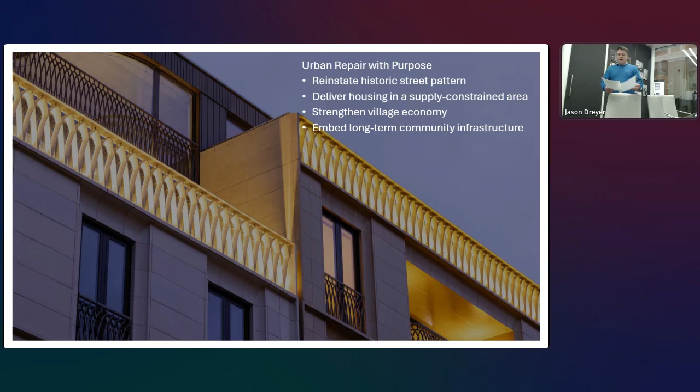Chapter 2. It's about the people. Marylebone Square excels not through gestures, but foundations. 79 new homes, including 25 on-site affordable units, which is around 30% provision, offering homes for key workers and local residents.

Instead of pushing affordability outwards, the project keeps people within the community, preserving the mixed social character that makes Marylebone feel like a village.

The new community hall, aptly named Marylebone Hall, anchors the ground floor. It is open, it is flexible, and it is civic-spirited, used for events, gathering, and neighborhood programming.

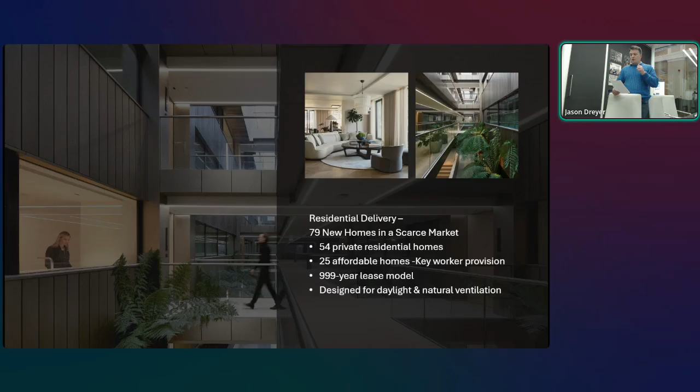Around the building, independent retailers are carefully curated, chosen not to compete with the Marylebone High Street, but to complement it. Importantly, during construction, the beloved farmers market remained in operation. Continuity of local life was designed into the process, not retrofitted. This isn't a building that lands on a neighborhood, it lands with it.

Chapter 3. A quietly radical approach to urban living. Improving how people live, gather, and connect, Marylebone Square's innovation is subtle but transformative.

Reinstating historic streets is placemaking innovation. It reinforces livability, movement, and walkability.

Retail innovation that centers people, not profit. Before occupation, units supported meanwhile use independents, giving local creative entrepreneurs a foothold in the local economy. Several, including Neko Health and Special Guests, have chosen to stay as long-term tenants.

Innovation with human purpose. A naturally ventilated 5-story central courtyard turns a dense urban block into a fairy tale small internal neighborhood floating in an urban forest. Daylight, air, greenery, live landscaping, and a social proximity support well-being with resilience, without reliance on mechanical systems.

Functional, flexible, and future-focused. The building structure includes no fixed retail partitions, allowing units to merge and subdivide. The program is designed to shift. Retail, workspace, community uses can evolve as Marylebone evolves. It is innovation expressed not through spectacle, but through intelligence.

Chapter 4. A place made to endure. Here, every layer has purpose. Homes that breathe. Dual aspect apartments frame light and air around a central courtyard, supporting natural ventilation and everyday comforts, as well as opportunity for neighborly engagement.

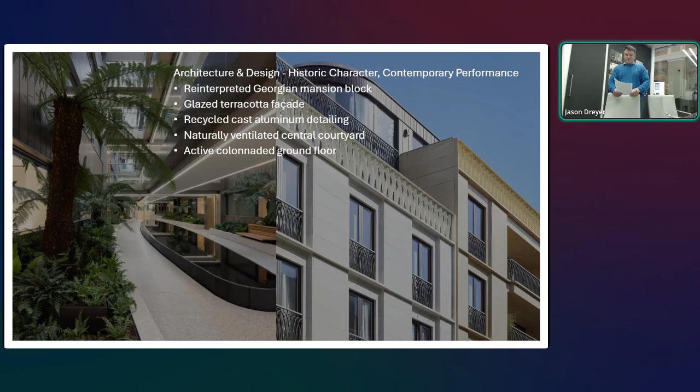Sustainability. Marylebone Square's sustainability story is holistic, targeting BREEAM Excellent, which is the top 10% of UK buildings, Code for Sustainable Homes at level 4, 150 PV solar panels integrated into a green roof, grey water recycling and runoff reducing roofscape, recycled UK sourced aluminium and ceramic facades, and off-site modular construction, minimizing waste.

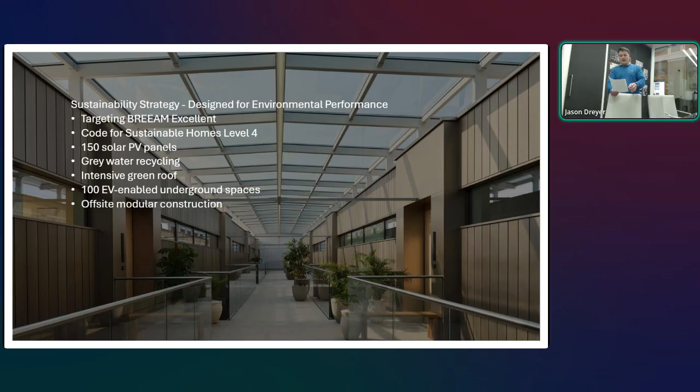And crucially, no demolition, meaning no embodied emissions from clearing existing structures. It's a sustainability strategy grounded in material intelligence, energy performance, and whole life carbon awareness.

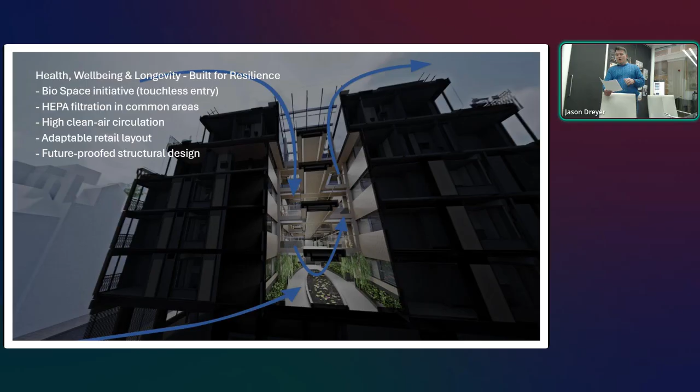Chapter 6, Stewardship. Marylebone Square's governance story is one of partnerships, extensive consultations through exhibition, workshop, and resident engagement, ongoing collaboration with the Westminster Council, farmers market preserved throughout construction, and a financial model for long-term management and community benefit.

Marylebone Hall formally operated as a civic asset, not a private amenity. This is stewardship, the kind that builds trust, not just buildings.

So, what is Marylebone Square? It is the repair of a 50-year gap in a beautiful Georgian smile. It is the strengthening of community through affordable homes and independent retail. It is a healthier, greener, more walkable piece of the city.

It is a building shaped by governance, crafted with care, and designed for adaptability. It is a place that feels unmistakably Marylebone, rooted in history, but confidently facing forward. In short, quiet, precise, deeply human, and entirely of its place. Thank you.

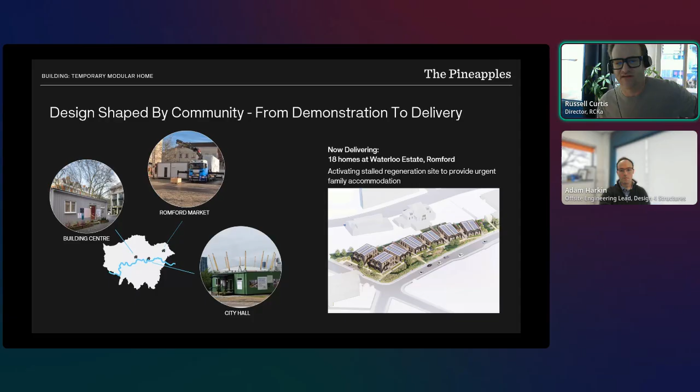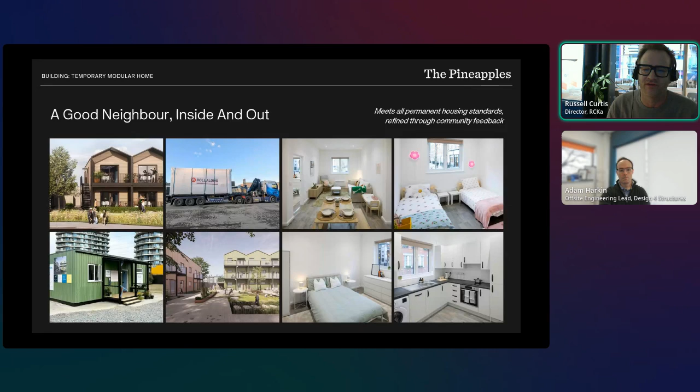So it's not just about the homes themselves and the interior of them, but also how these are sited. They are intended to be good neighbours to people and settle quickly into a local area, even if that is a meanwhile use on a site that might be stalled or whatever.

Adam, you want to talk a little bit about this?

What we've created isn't just a modular home, it's a system. Standardized modules create 1 to 4 bedroom homes with the ability to go beyond if required. Everything is digitally coordinated for clash-free, build-ready certainty, with 90% happening in an off-site factory controlled condition. This reduces waste and improves quality.

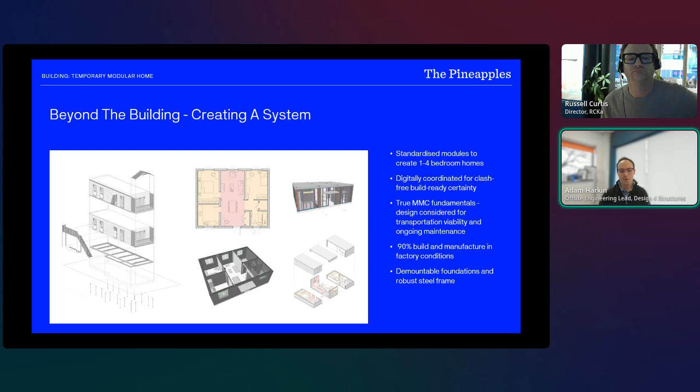It's designed for a 60-year lifespan, which takes into account multiple redeployments over that time. Demountable foundations and a robust steel frame mean the modules can be lifted and relocated elsewhere with minimum ground disturbance. This transforms temporary housing from a disposable expense to a long-term public asset.

Instead of spending money on nightly hotel rates, councils invest once and own an asset that they can relocate and reuse for 60 years. After 3 to 5 years, the homes have paid for themselves through savings, but they can keep delivering value for decades to come. It's resilient by design, adapting to changing community needs over time.

These visuals are a time lapse from the installation at the Building Centre in London. As can be seen from these, the modules can easily be installed on even the tightest of sites.

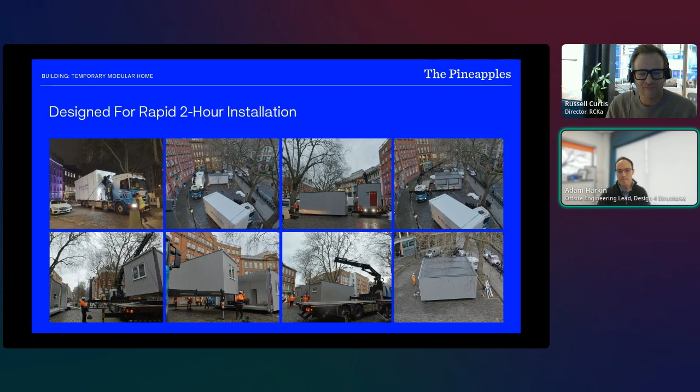Environmental performance is integral to this system, and it starts at the design stage. Design 4 Structures provided complete design coordination using DFMA principles, meaning every element is coordinated digitally before manufacture. Through this coordination, we achieved clash-free build-ready certainty early in the design process, which reduced rework and material waste.

This digital certainty then enables factory precision, which reduces waste by around 90% and cuts build time by roughly 30%. Factory controlled production delivers approximately 40% lower embodied carbon than traditional construction.

Because the system is circular, fully demountable and recyclable, with complete digital traceability of every component, the environmental benefits compound with every relocation over its life. DFMA coordination at the front end enables this circular performance at the back end. This is truly sustainable construction where the environmental values multiply over time rather than being lost after one use.

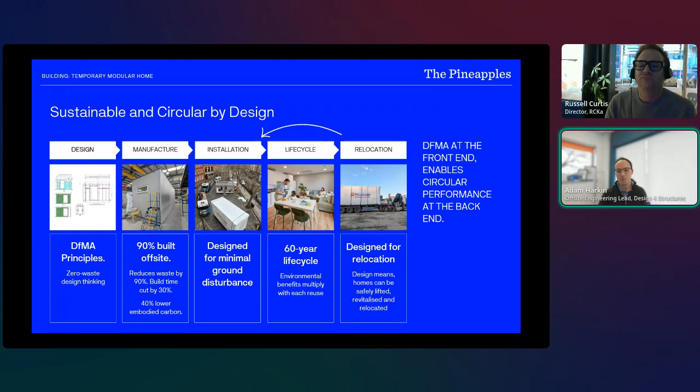As I said earlier, although these are temporary homes, we need to stop calling them that. It's a meanwhile deployment, but they are permanent homes. They're homes that can be moved many times, and we see them forming part of a long-term vision.

Partly because they can be moved from place to place and repurposed as developments come forward, but also in the long term these modules can be reused and reallocated and turned into permanent homes for permanent locations. So in 60 years' time, they could still be providing decent homes for families in need.

We reckon that there's around £63,500 saving per adult per year, and so these will pay for themselves within a 3 to 5 year period when purchased by the local authority.

It's important to hammer home the fact that these are fully compliant, fully space standard compliant homes. They're actually more generous internally than a lot of new build housing, and they're also certified, warranted to BOPAS, and it's an asset that the local authority can purchase.

There's a summary of where we are, but I thought I'd drop this photograph. It was taken yesterday, as it happens. Nice blue sky. That's the first of the modules I mentioned earlier in Havering in Romford being lowered into place. That's the first of, I don't know how many there are in total - maybe around 80 modules.

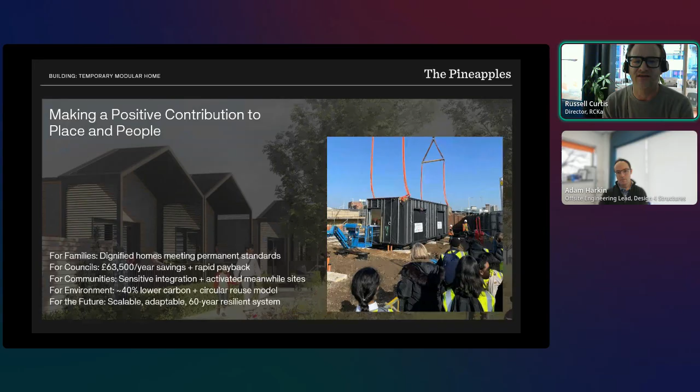Each one just lands onto, sits lightly on the ground, sits on small foundations, and can be zipped up and connected in a couple of hours. I think that's it. Thank you.

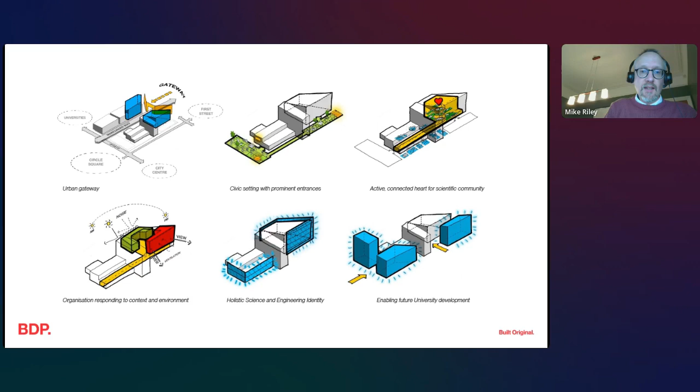Hopefully the slide will move. It wouldn't be a presentation without a slight technical hitch, would it? Oh, now it's gone back 5 slides. Apologies for this.

Once we'd set the concept for how the site captured the elements of the vision, we had an approach to how we would design this building, which was very much setting back from the street to give it that civic presence.

It was expressing the functions of the building so that undergraduate teaching, visibility and showcasing all happen at the lower elements of the building. And it's responding to the urban site by articulating the workplace and research elements of the scheme towards the top of the building.

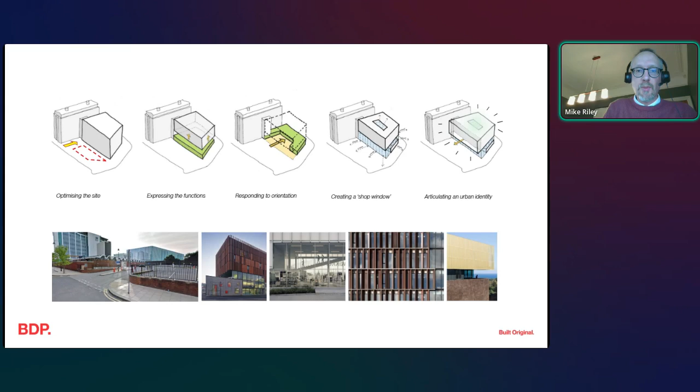A critical part of this project was making sure we were responding to the streetscape, being part of the city, and being mindful that although there is a teaching, research and workplace element to this building, it was seen in context of the neighbourhood, responding to the residential uses close by to the site.

Key elements of the approach were about having this gold facade which wraps the building at the upper levels. The science and engineering design provided views from that elevated roadway into the super lab, which was one of the core transformations in their teaching for the cohorts of undergraduate students.

It enabled them to teach a huge number of students all at once, rather than having to do multiple repeat teaching events in sequence. This freed up time to do academic research as well as teaching.

A key element for the project was very much about identity. There were 4 departments within this building, and we worked with them to identify imagery associated with the various science happening in the building. We looked for images that occurred within each science discipline, and brought these together to create an abstract pattern that was used on the external facade and also as a motif internally on staircases, glass screens, etc., to drive home to the student body and the city that this was a building with a huge amount of identity and quality, that was a home.

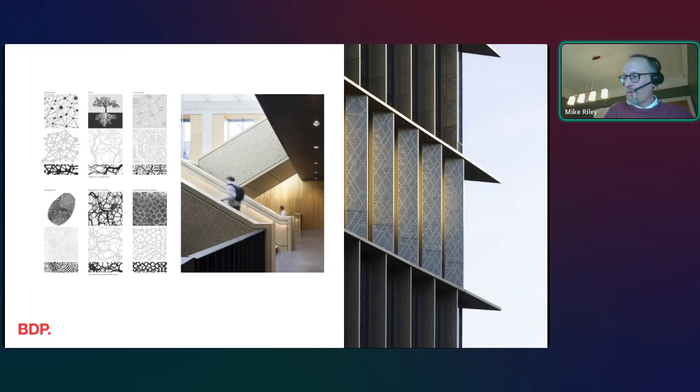I think a key part of that element of it being a sort of home for the university was by giving it this ability to be easily recognizable.

It also started to think about how it would work from a philosophical point of view for when students joined. Taking a section through the building, we worked hard with the users to think about where the best functions would occur. The lower parts of the building were very much about undergraduate study - this idea that you'd join as an 18-year-old coming into an environment like a scientific workplace, giving you a high quality of environment, enabling you to have social, professional, informal and formal interactions that would tell you what it was like to be a scientist.

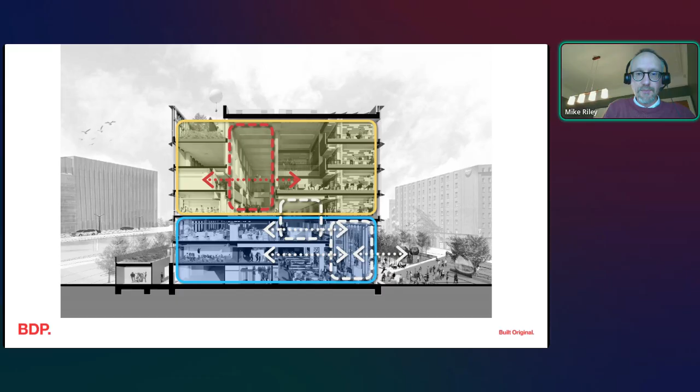As you move up through the building to the upper stories, that's almost once you've graduated - this is where you'd go to do your doctorate, where you'd do your work life, become an academic, do your research. You still had a similar sort of environment, so you could see you were moving through the ages of literally age, and also ages in your career itself. That was an important part of this scheme.

Internally, that translated to an incredibly flexible building. From a sustainability point, we took a very long life, loose fit approach to the structure - large spans, open spaces, hard durable materials that would look good for a long time, introducing natural timbers for warmth, etc. These spaces were designed so that in day-to-day operation they could be social, but in other settings you could invite trade shows, industry events, local community sessions, all coming into this space and changing its purpose. It was very adaptable and part of giving back to the wider community.

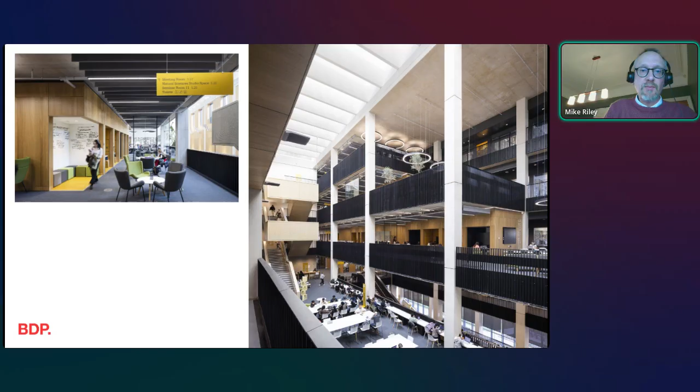That idea of making sure people were involved and helped us design these spaces followed through to the workplace above. There were a series of departmental homes for the students dotted around the building, and we worked hard with the student body to involve them in getting their department's identity into the design, while giving them flexibility to show the rest of the academics and students who come to this building because it's a great place to work. It showed them what they do day-to-day and gave them an ability to highlight their good quality work and best practice throughout their academic and research life.

At its core, though, this building is all about transformational science teaching. It's all about research, all about laboratory spaces - they're all highly technical spaces in this building. So at the heart of this, we had to be very clear about the functionality and making sure the functionality of this building shone through importantly in every aspect of the scheme.

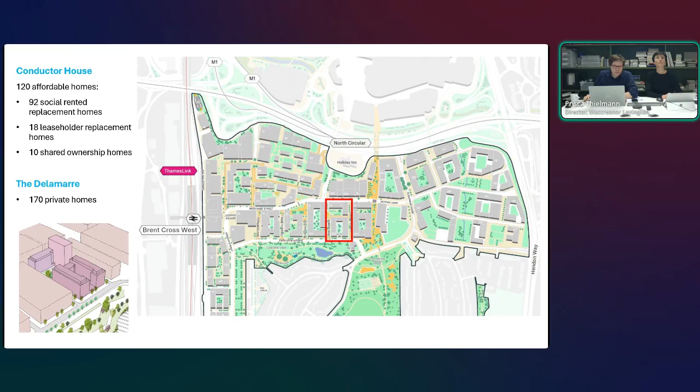And a bit like our work in King's Cross, the story begins well before the first residents walk through the door of the new building, which happened this time last year, roughly. So here's what was completed several years in advance of that moment: the first major new mainline station in London for over a decade, Brent Cross West, was open, 2 new parks, a parade of shops supporting local businesses that are now being relocated into the permanent master plan, and a visitor centre where anyone can walk in and ask a question 7 days a week about the development.

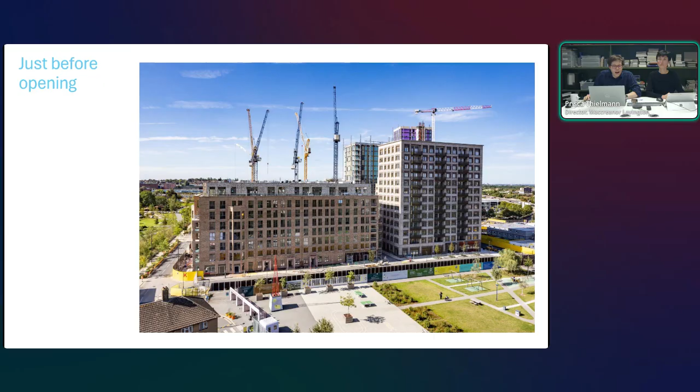So this was the scale of the delivery before Conductor House and the Delamarre were delivered into these green spaces and new connections into central London, which was all part of the strategy for bringing these buildings forward from the beginning. More importantly, perhaps, on the ground, these key social spaces were there for future residents and other local people to take ownership of.

By investing in all of this, there was also to date a £230,000 community fund project, now having awarded funds to 52 community projects throughout the local area. We were trying to embed these aspirations of the town before buildings were completed, giving the place tangible identity and benefit for locals who were going to be moving in there within the coming years.

And that really set the context for the engagement we did on Conductor House more specifically, where residents of the Whitefield estate similarly took ownership of that process in what had been a very, very long wait for this building to come, well before Related Argent was involved, to get to the point of walking down the road and into their new homes. This project has been an idea for the same amount of time as King's Cross has.

And on the macro level, that included making sure that the replacement homes were the first homes to be delivered across the 6,700 planned for Brent Cross Town. But on the micro level, it was about several things.

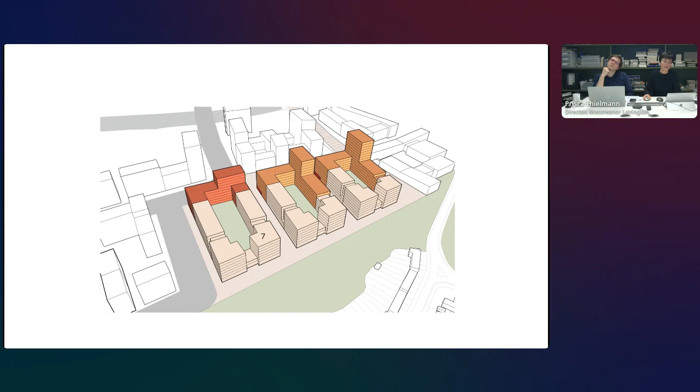This is obviously still a large-scale jump in the context of the very suburban setting of Brent Cross. In order to achieve a human grain of scale and to mediate with the surroundings, we added further to the building's volume articulation. Following on from that, we continue to interrogate the length of the buildings and the blocks and the streets, and worked on one of the plots.

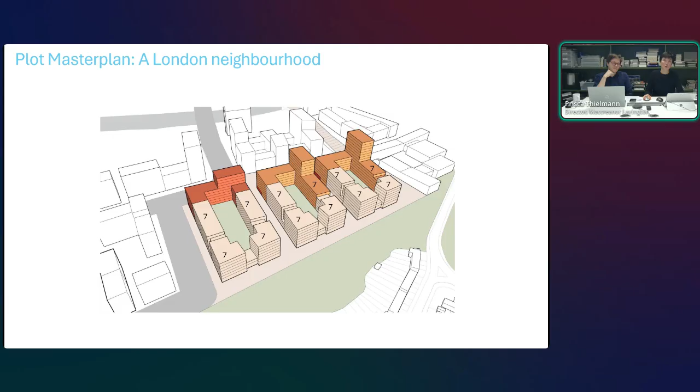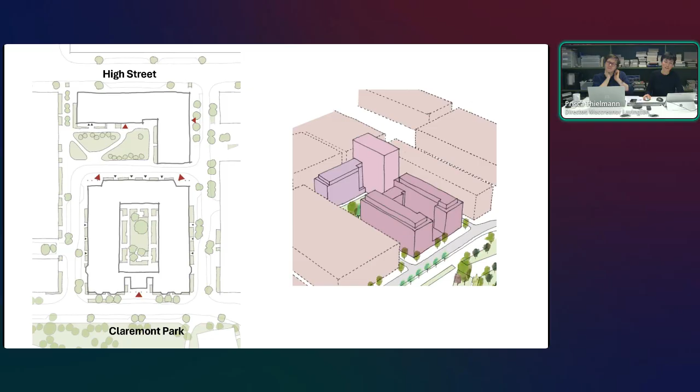The plot straddles two clearly defined spaces, the future High Street to the north and Claremont Park to the south. We recognized that there was an opportunity to create a more residential, more intimate environment within the plot itself. We therefore split the building into two parts and integrated a network of smaller streets, and importantly introduced a public pocket park and a courtyard garden.

These spaces are really important to us because we strongly believe that people's feeling of self and ability to desire to connect to others around them is strongly impacted by the neighbourhood and the immediate public realm that they live in. So while the interior of the buildings are obviously mostly private to the residents because they're individual homes, the public realm with the facades framing these spaces are all intrinsically linked to the experience of these homes. We see these outdoor spaces as outdoor communal rooms.

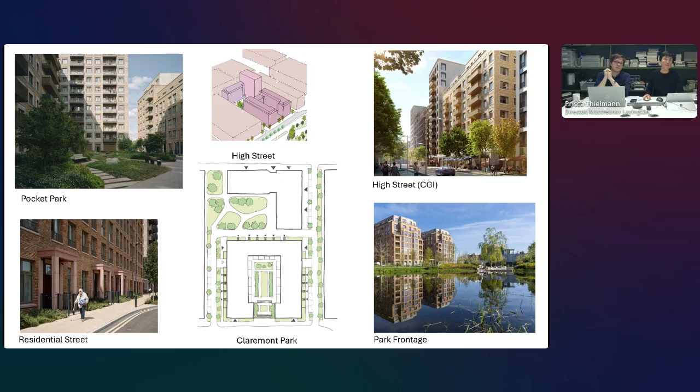I will now take you on a walk around the buildings and through the spaces I've just mentioned. Approach from Claremont Park, the articulated facades with bays and balconies are engaging, and they are at once playful and formal. We generally have given careful consideration specifically to how the buildings meet the ground floor in order for the surrounding public ground to feel animated and safe.

Facing the park, the bay windows provide depth and detail. The use of a gym and a shared workspace gives passive surveillance and safety, a feeling of safety. The main entrance to the building is via a central pavilion, which has people going in and out and is staffed.

Moving around the corner into the residential streets, it was important to us to provide a rhythm along the length of the street and to increase the sense of a residential quarter and the character. So we introduced individual front doors and ground floor apartments, so they have these framed porches and front gardens. And this encourages neighborly conversations on the way in and out and provides a level of privacy.

At the core of the site, so we're walking on the core of the plot, we introduced the pocket park, which adds a lovely, more intimate counterpoint to the larger parks. It's totally public, but it's likely to serve the residents that live immediately around it from the two different buildings, as well as the other plots either side.

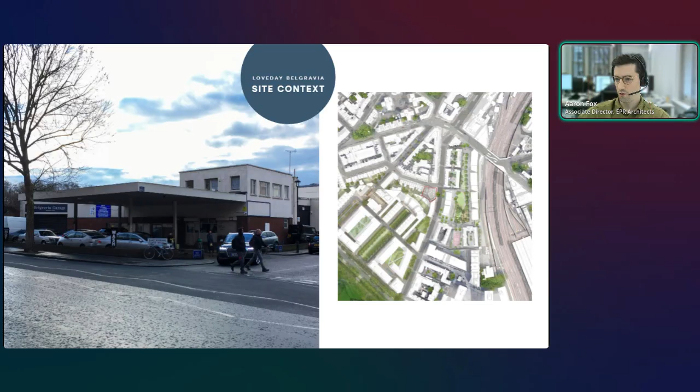A London plane tree is positioned in close proximity next to the site, as you can see in that image. A Crossrail 2 service tunnel exclusion zone sits below the other half of the site, which will be coming in the future. It adjoins the Belgravia Conservation Area to the west. So it's an exciting and constrained urban site.

There was removal of vehicle crossovers and decontamination of the site, so you can imagine lots of fuel and below-ground obstructions such as tanks that needed to be taken out and rectified once construction had started, and retention and protection of the existing tree, as the building is cantilevered structurally over the root protection zone of the tree.

Enhancements to the public realm with additional area provided for adoption by the local highways to improve pedestrian movements around the site, giving some generosity on an otherwise heavily urban site that was there before.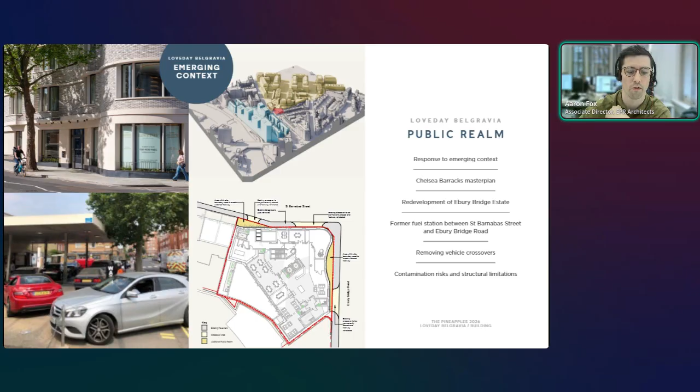So it was really important to design a building of strong architectural quality that improves the local area and its building users' experience, with strong collaboration with local stakeholders, including Westminster City Council, the Grosvenor Estate, the Belgravia Society, Belgravia Neighbourhood Forum, and Residents Association. Interestingly, the building design actually helped to inform the Belgravia Society's design code that was being updated at the time of this project being developed.

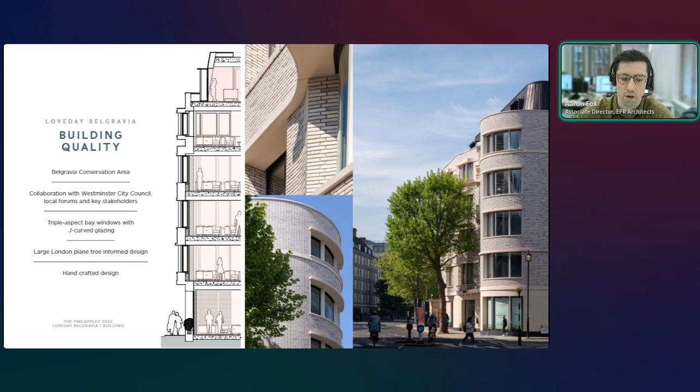A strong material palette that is sympathetic to the neighbouring conservation area and emerging context was used, informing the use of materials such as brick and stone. The London plane tree informed the design, as the building curves around the tree and addresses the corner of the site. An important architectural feature is the triple aspect bay windows with J-curved glazing, which enhance the building's architecture and ensure unobstructed views out from within the building.

The interior design was carefully developed by EPR architects as well, to both reflect the architecture and improve the user experience. Designed with a mid-century modern aesthetic, the design is based on the concept of a home from home. The use of texture, colour and warm materials are included to provide further assistance to residents who may be visually impaired or have physical disabilities. Seamless wayfinding is provided through the use of artwork and accent colours on each floor.

The building, as we've discussed, enhances the character of its neighbourhood and improves the public realm. Loveday, as an operator, continues to engage with the local community and be a considerate neighbour by championing community connection and supporting the local economy.

Local residents are actively engaging with and using the facilities available within the building for coffee mornings, lunches and music events. Luckily, one such event was witnessed during the judge's visit last week, with local residents from around the site enjoying lunch at Loveday Belgravia to celebrate Chinese New Year.

Goods and services are sourced from nearby businesses, including butchers, florists and laundrettes, and partnerships with local groups have been established to deliver enriching activities for residents, such as gym sessions, art workshops and gardening.

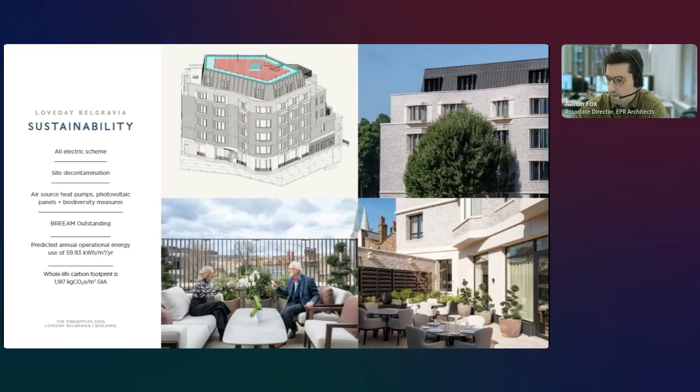The project continues to successfully cater for residents with different care needs, including rehabilitation, dementia, and nursing care. The rooms are designed to provide for flexible bed layouts, and soft spots are installed between rooms if required to combine rooms in the future.

Views out and from within the guest rooms are carefully considered to maximise the comfort of residents living with dementia. A lot of research was done with papers such as University of Stirling dementia care, and the NHS guidance to make sure that we had a really hard-working but suitable scheme for its residents.

Technology assists with the quality and flexibility of care provided with CCTV, nurse call, and circadian lighting.

The building's plan form is designed to provide residents with the opportunity to exercise, with suites and communal lounges positioned on the outside of the plan, while services, storage, and back of house areas are located in the centre of the plan. Corridors do not have dead ends, providing comfort for dementia residents not to become lost.

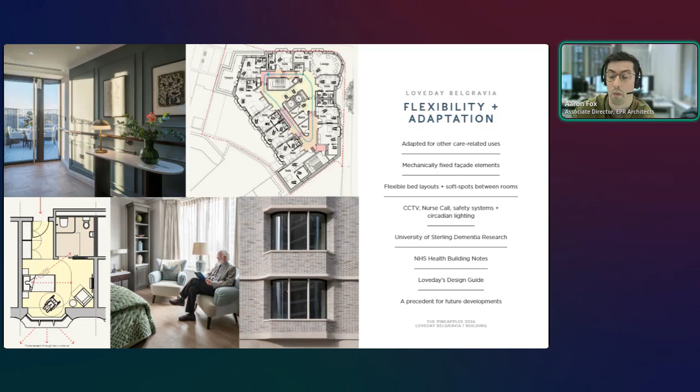I just wanted to finish on a quote from one of the residents: 'The detail, thought and care which has gone into the design of this building has so far been matched by its excellent ownership, management and care.' We at EPR are really proud of the Loveday Belgravia project that continues to improve the lives of people in and around itself, and seeks to be a precedent for future developments of this type. Thank you.

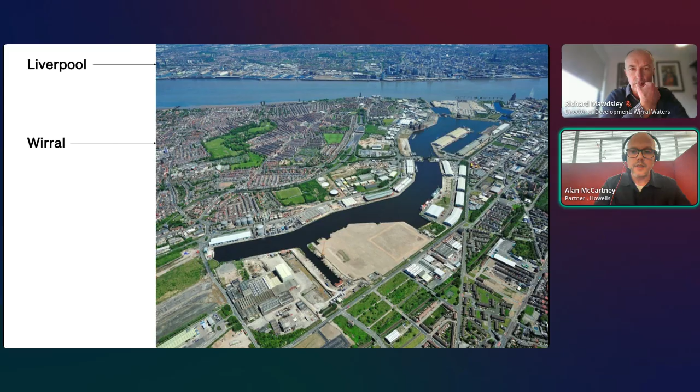The site, before it manifested to where it is today as a brownfield, post-industrialised area, had the first publicly funded municipal park in the UK. That was Birkenhead Park, inspired by New York Central Park. The first street tramway in Europe was also here, which, as in many UK cities, we're putting back in the trams that we took out, on our landscape and design in anticipation of that, with the tram stop coming further to the east of our particular site.

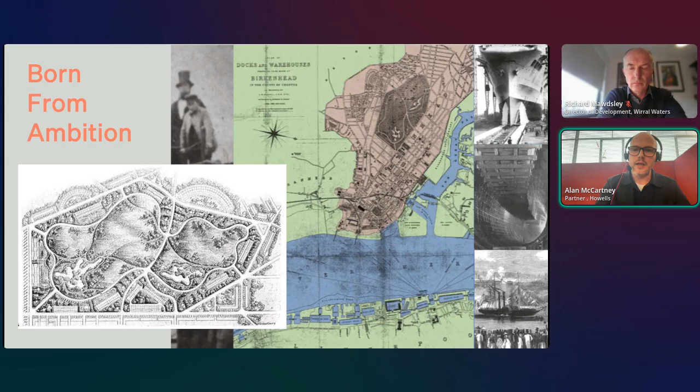The SS Great Britain was built here. It was launched in Bristol, but Birkenhead was the core maritime shipbuilding hub, and Cammell Laird are actually still based on the site today - I'll touch a little bit on how we're trying to create context as a result. There were other pioneering social housing models brought forward in this area too, very much testament to the way Peel have achieved a delivery model with negative value and negative investment equity requirements in this particular setting.

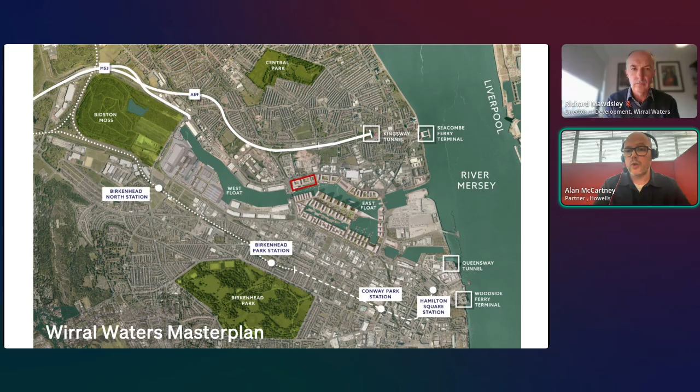We're part of a master plan which, at the time of submission, was the largest ever brought forward in the UK - overall about £3 billion worth of development, 20 million square foot. But outside the construction of a construction skills college, we were the first development to go, so we really needed to create the wider context. Our overarching design driver was a place-led, jobs-driven initiative, and that's the core aim of the master plan itself.

So Miller's Quay is a £130 million investment project, 500 homes across 6 buildings sitting on a 6-acre site. It's a build-to-rent model with 20% affordable housing provided, and then Richard will be able to touch on the delivery structure and the mechanisms that enabled us to come forward with the design.

The impact, as I've touched on, is that we were the first major site to come out of the blocks of the master plan, effectively establishing a context which hadn't existed, particularly in the residential world. We've had 440 students involved in the construction of this development, who came through the Construction Skills College, brought first as part of the master plan. 1,000 construction jobs were created in its delivery, and 75% - and this is where Graham's were fantastic as contractors - 75% of the workforce lived within 30 miles of the site, with a £44 million spend back into the local supply chain, so that circular economy principle was absolutely embedded and key to how the tender was won.

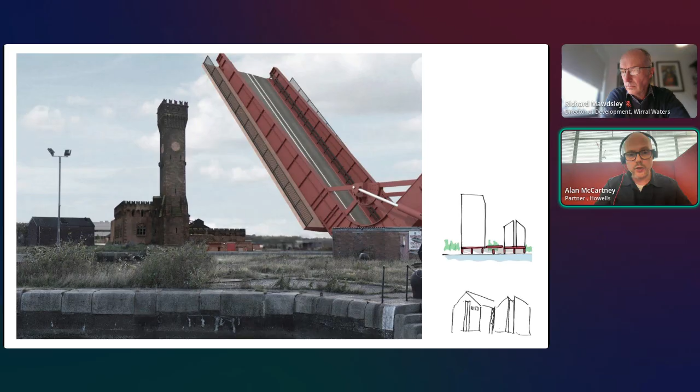Some of the most successful are all of the bridges that give us splashes of colour. They were once steam driven, and the steam infrastructure is actually retained in situ on our site. Today they're electrified, but still in full operation and part of the actual story and context.

In the 1990s, about 400 metres, half a kilometre away from the site, this grain warehouse was converted into residential homes, into flats, and those have sat effectively in a desolate landscape of industrial brownfield land until our scheme came along close to that setting.

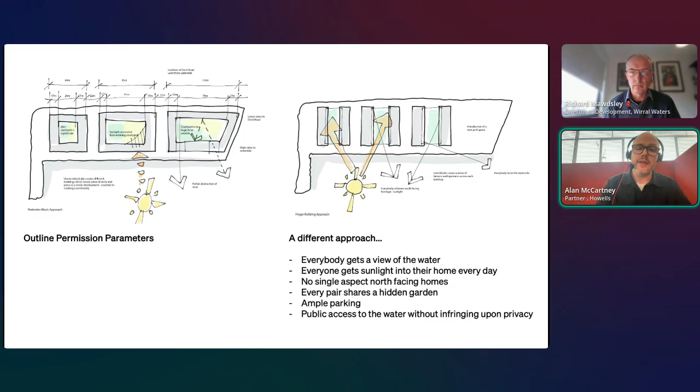The outline master plan had sound principles in its intent, but we felt a different approach would be much more appropriate—just very basic common sense methodology that everybody would get a view of the water, everybody would achieve sunlight into their home at some point of the day. No single aspect north-facing homes would be provided, and every pair of buildings would have a shared private garden for the residents. Ample parking, because that's part of the story on this site, and everybody would have public access to the waterfront, promoting future and ongoing access for residential moorings and sports and activities.

Really ordered and structured repetition in the master plan and the architecture, partially driven to derive quality and efficiency in the overall building approach, and also akin to how the Victorians had ordered the wharf side long before we were involved in the site.

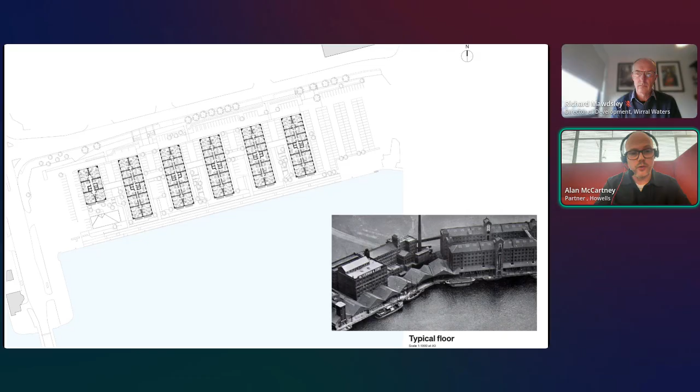But we did also want to indulge in this idea of beach huts by the bay, to have confidence and colour, to create a place that had its own identity. So we stepped quite firmly away from, say, a brick solution, and chose something that would allow us to create personality, context, and setting.

That allows residents to say that I live in the red building, I live in the blue building. So that intuitive way of showing a sense of home and place is created instinctually by the architecture itself, complementing the maritime context and the maritime colours relevant to the site's history.

And there were a few other themes, particularly in the way that we dealt with metal work and balconies, and the generosity of balconies that came from 1930s boat building and boats that were built on the site. And that's led to the buildings themselves.

We've got a mix of one-beds and two-beds, efficiently derived. These are buildings that have very subtle ways of making them quality homes, such as a 3.2 metre floor-to-floor height, just to give a little more generosity to the ceiling height, differentiating the quality of the home from other products, let's say in Liverpool, which we're quite close to.

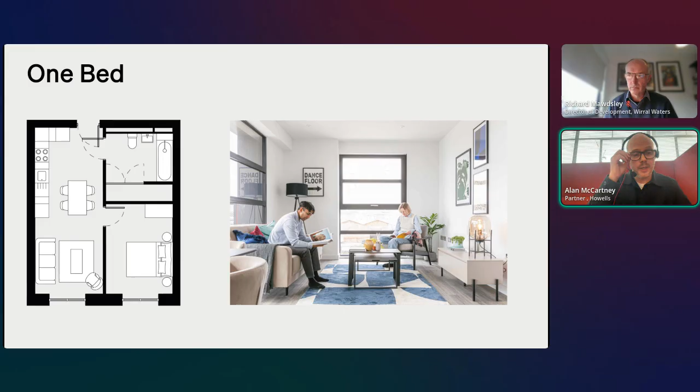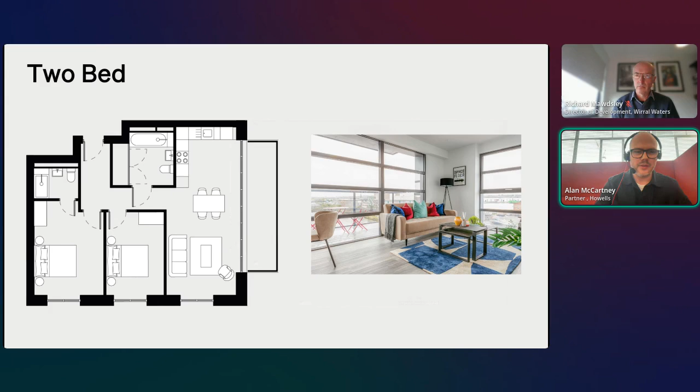The two-beds are slightly more conventional in their setting, but these ones have 6 metre wide balconies, really to appreciate the generosity and the wildness of the setting and environment within which the scheme is placed. Each building has its own colour and identity, its name derived from the minerals found on site during the early site works and excavations, as a way of embedding the legacy in the setting.